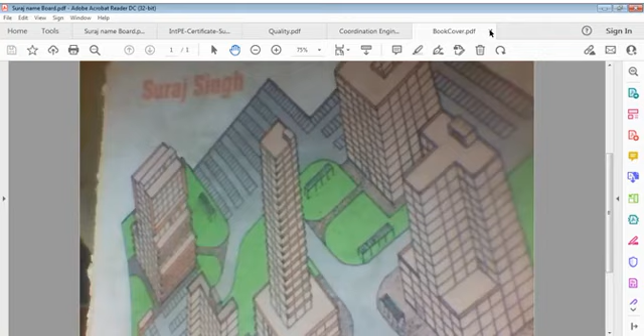Coordination, engineering, and public engineers - what do we have to say about this? We have to think of this in a different manner. Samanvaya Abhiyantriki, we call it in Hindi - coordination engineering. We call projects, plans, and engineering, and public, the general public. For reliability and quality engineering, cost, and delivery, they have to think of it. Coordination engineering is one must. It's something undefined, but it's essential. Without coordination, nothing works - that's what you have to think of. Coordination, what we can see in building.

What's coordination actually? In buildings, coordination is one way. In other plants, it's another way. There are systems, of course - systems are different, works are different. In life, coordination - so you can say everywhere in life, coordination is one way. In profession, it's another way. In society, there's a difference, and we can generalize if you think of it that way.

What is coordination engineering? We may say first we have to understand coordination, and then we can apply it in engineering. Although everyone talks, even a student in primary school coordinates, but we cannot recognize it. The student cannot understand it. Without coordination, nothing can be studied. You cannot study anything if you don't coordinate properly.

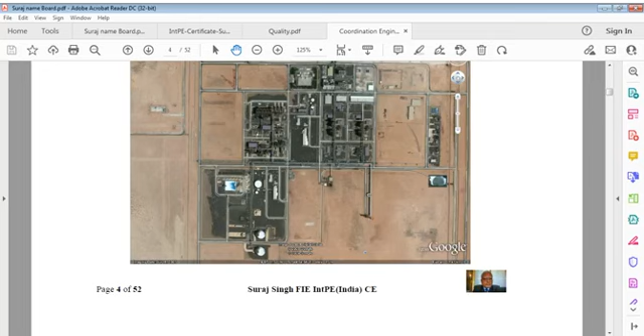Yeah, I'm just trying to reflect how everything... I don't know, it's here. Yes, it's in the row. If you can see many projects here.

Problem is, if I stick to that browsing and say here, plate 8, and that may be... not this one, school this is, sorry, hospital this is, yeah, this LNG. If you can see this LNG here, this was, I was involved actually on this. You can see these tanks here, 3 tanks and a 4th tank, and this was where I was involved as a project officer engineer.

This was for purposes of recording and checking, but I was also talking about control of another villa. I'm referring to this, this is also the same. Here also concrete of a GGBS type, you can say PFA type was used.

I don't have a photograph of the villa, but on that project I had to coordinate completely as the technical leader of that project. I had to coordinate accordingly, and I'm trying to tell you this for a reason. It's a very important item we can discuss.

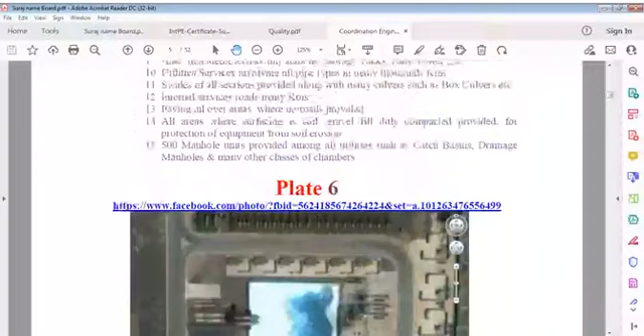As far as silica fume is concerned, on that project I coordinated completely.

I did not have knowledge of computers, of course, at that time. Computers were available, but I did not take any interest in that. Many people forced me, many leaders forced me, many engineering leaders forced me to use computers. But I was scared my eyes would be badly affected, and actually it was a fact. Now my eyes are affected. No problem, life is moving on.

When we consider silica fume, I'm just trying to tell what it is and how does it work.

Silica fume means very small particles, these are smoke particles, or fume particles, smaller than size of cement particle, much smaller than even smoke. When you have smoke, these are particles in suspension in air, very light particles, and these can fly in air, remain in suspension for hours together. Silica fume is that smaller size, or same size as particles of smoke. Cement particles are even heavier than that smoke.

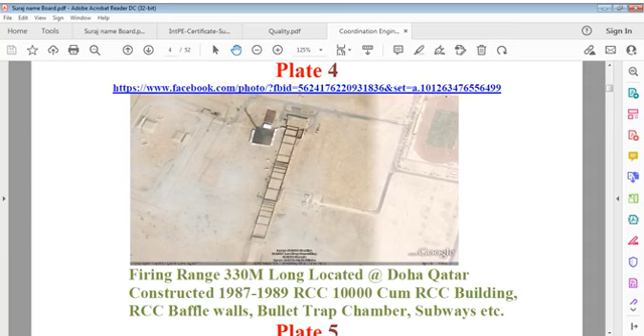So we have to consider this way now. If we go to another one here, if this is of course 87, this was.

This is an ordinary project, you may say, very ordinary project, but here there's electrical and mechanical importance, and here is civil importance. How to do work in civil engineering - I will tell a story of this project. It's actually very small, but professional work was carried out. You can see plywood was used for formwork, but the story behind this is very important.

I was very serious about foundations in this project, and in that area where this project is located, soil is not to that mark. This means soil is clay, probably having Montmorillonite content - that is a soil mineral, clay mineral we call it. Montmorillonite clay minerals, and that's very harmful.

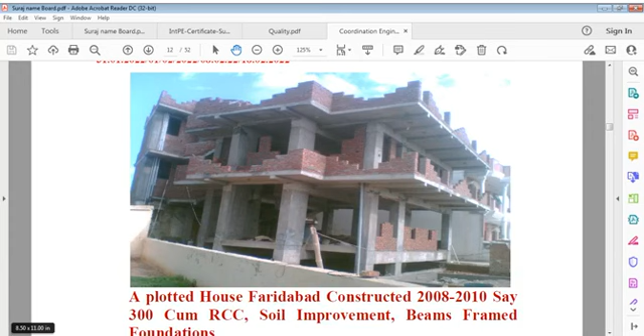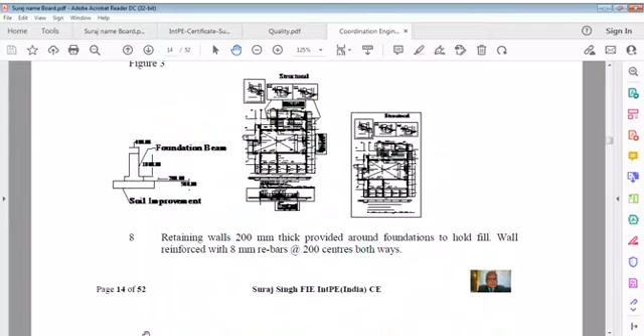This is another point that we use: if you see this portion, it's a continuous beam foundation, or you may say framed foundation, or kind of horizontal boxes connection.

You can see this complete. If you see the plan, all beams are connected. These beams are all continuous beams through columns, yes, through columns, continuity of columns. Beams through columns act as a kind of horizontal frame, not vertical frame.

Horizontal beam frame, and this reduces bending moment in foundations. Cantilever bending moment doesn't mean anything here. It's only fixed beam continuation, and you can say framed. It acts like a portal frame for vertical forces as well as horizontal seismic actions.

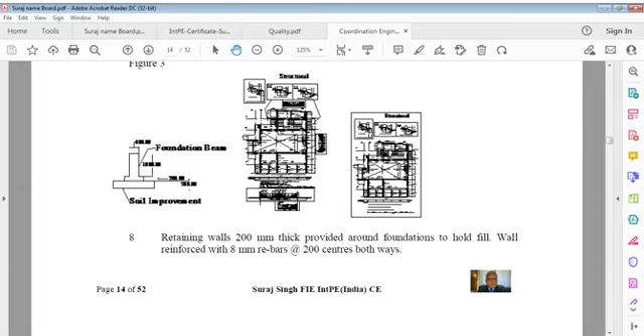When columns are there, during earthquake action, these beams work as columns, and these columns work as beams in that case. So you may say that's the impact of seismic force on this frame. You can see this whole structure is framed continuously.

This is the horizontal force coming onto this. This frame is very resistant, heavily resistant to that force. If you consider horizontal force coming onto this section, what will happen is a very strong column, its size is 40 centimeter by 120 centimeter. It's a very strong column, and this will give better resistance to that force.

Horizontal shear, and if it's in both directions, what will happen? Even if the building dances, it will stop dancing after some time, and that's the main functionality here. The dance will stop.

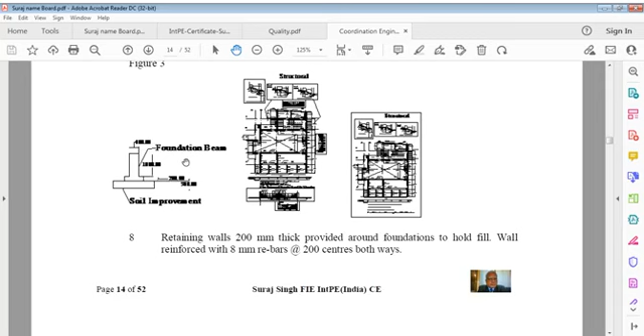Now, why do I say in buildings coordination is like that - architectural and structural we have to understand, structural and services we have to understand, mechanical or air conditioning services to electrical services, all these services to plumbing connections or plumbing locations, structural and all these services, architectural and all these services. And we have to understand decorative coordination.

We also have to understand building management coordination, which is also a very important subject. Just like these days we say 3D or 3D coordination through BIM, but that's not very important here, I'm not interested in talking about that. Now what I'm saying is, in buildings in those days, the talk was...

Architectural structural coordination, structural architectural coordination, structural services coordination, or you can say first fix coordinations - HVAC, electrical, electromechanical we call it, architectural, structural, and lift coordination, lift well coordination, or you may say many other types of coordination. Building management is a very important one.

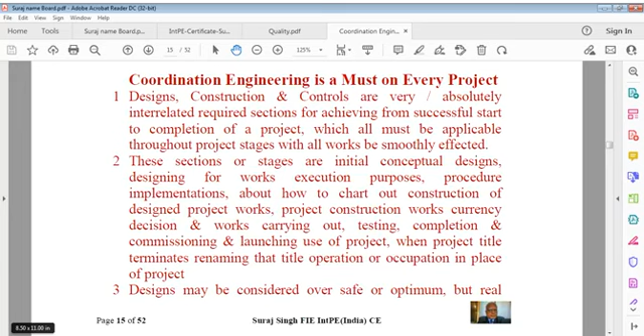That's why I try to see this. If you want to show, I can show you also this, no problem. We'll just recommend, and you'll see this. Why I'm saying it's important to keep watch, and that's also important.

The loading is coming in, and you can see this temperature here now. I'm printing it out, and you can see it in PDF format. It's coming, it's here now. You can see this format is coming, and of course we have to be realistic in this to keep watch.

It's coming, hold on. Come on, don't waste time. We have time for this. Not responding—what's not responding? It's come, it's responding now. So it's there, you can see here.

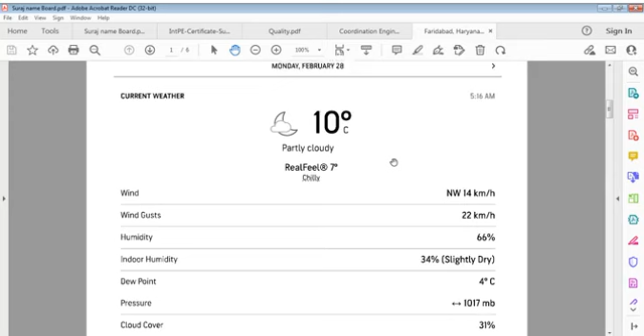It is 10 degrees. Current weather February 28th, 5:16 a.m. Partly cloudy, 10 degrees. Wind is 14 km per hour, wind gust is 22 km per hour. Humidity is 66%, indoor humidity is slightly dry at 34%. Dew point is 4 degrees. So 10 degrees and 4 degrees.

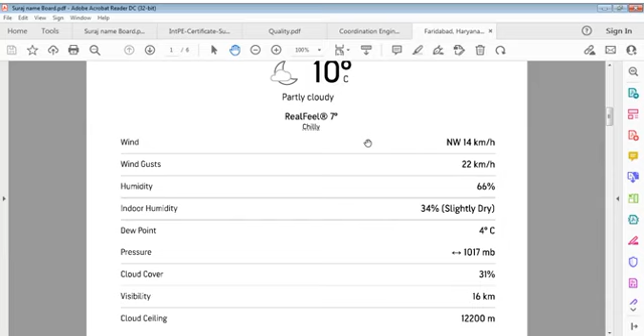Pressure is ordinary and 31% cloud. Visibility 16 kilometers. In daytime 27 degrees forecast, and maximum UV index 6, high. Expected is 30 kilometers wind gust. And next day is 12, so it will come down to something.

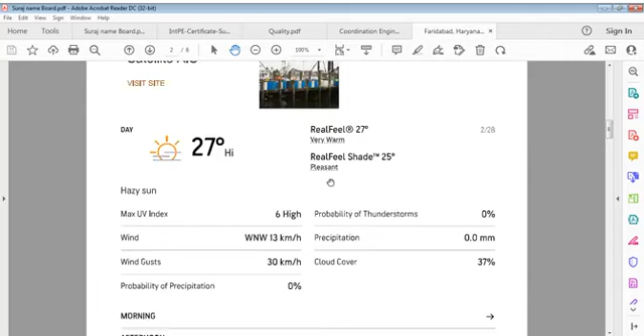So I wanted to show all this to you, and keep it off now. So we can move on to our subject. Just trying to show you how we have to link all this, and now you can say, okay, that's fine.

Come back to coordination engineering. Coordination, as I say, is a very important point in the engineering world, and we have to be a little serious about this. It's not only that—everybody of us should be serious, because it is coordination that helps us, and it helps in quality and coordination also.

Quality is important, and every day I talk of quality, and quality remains with me in my mind. I see these days people are not serious about quality. I think quality culture has changed—that if no quality means no problem, people think so. Is it? No, I don't think so.

But generally, people don't want to learn any quality. They don't want to learn how to get serious about work. They just want to remain in their mind without any narcotism—they want to enjoy life. You keep enjoying life, meaning not facing struggles in life, and quality is a struggle. In fact, quality is very poor—we can say no value of quality if no value of coordination.

That's why we have to keep sleeping, or we have to get awakened—that we have to decide. No one can help it, and coordination engineering is so much different. We can say it's for everything. Coordination engineering is a must on every project.

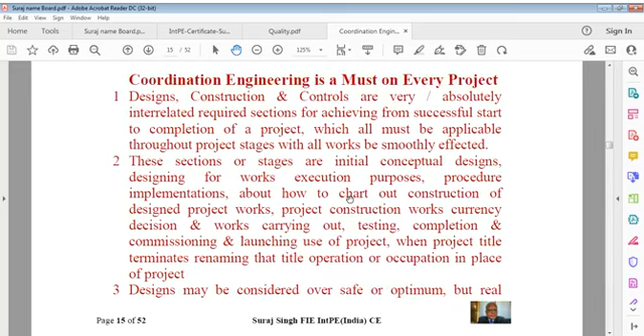Let us say if we can do something on this—coordination engineering is a must. Is it must-able or not? That's the point you have to consider. Are we so serious about this or not? That's the point you have to consider. How can we help? It's the point we consider.

So it's a very serious issue, coordination engineering, and we have to coordinate. We have so many ways to coordinate, but first we have to understand what we are going to do, and that's an important point. What we have to do, we can't say otherwise—what we have to do, we should do.

That's right. For example, there are so many activities in buildings. How many of you understand? I'll let you know what we talk about this, and the points should be very clear. We can find out anything in that, but I speak something from my own writing.

As I showed you this book, which I showed the cover of here, we can talk something out of that. We can take something out of that in this book. I would say it's not actually, it's just a note—so many notes are here, and we can take those into consideration, and some activity list is there.

It's very dark actually, I can't speak—it's very, very dark. I'll take it some other time.

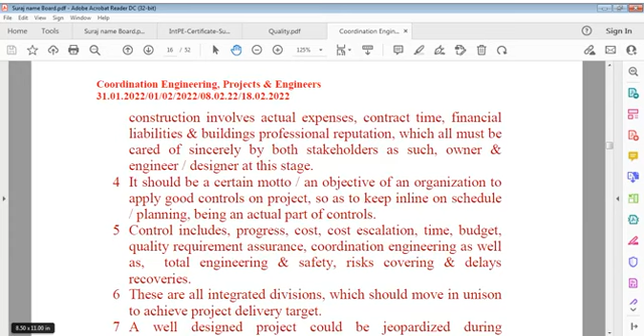Based on my understanding, what activities do we have to think of, what activities do we have to consider in buildings or foundations? First of all, we have a list of activities which everybody knows. I'll give this in writing too, but here I'm just giving a brief talk on the concept. Whatever comes to my mind, I'll bring in my experience from papers or learned papers.

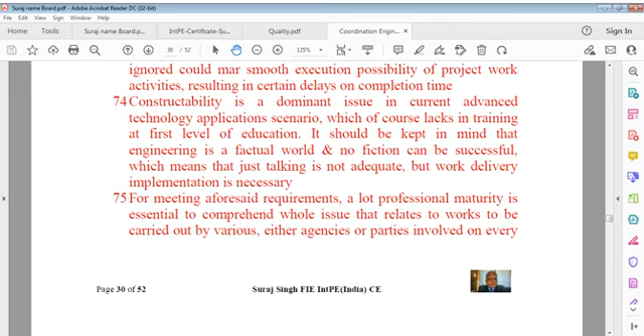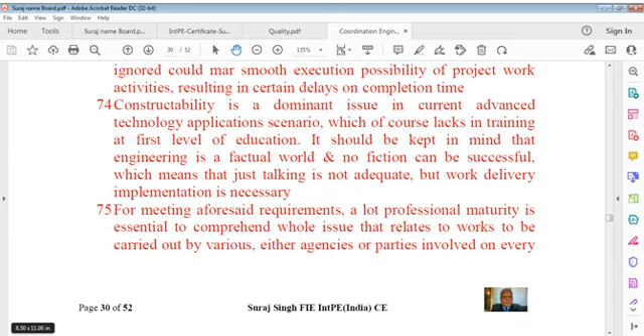For example, constructability is a point which is standard. I can say constructability is a dominant issue in current advanced technology application scenarios, which of course lacks training at the first level of education. It should be kept in mind that engineering is a factual world, and no fiction can be successful, which means just talking is not adequate. Work delivery and implementation is necessary. We have to understand this point. Constructability means there is no way out.

If you don't do it, as said before, the total concept of constructability, or buildability, must be taken care of during all such designs, and respective coordination, which if ignored could mar smooth execution of project work activities, resulting in delays in completion time. Design within this stage must be coordinated correctly, to an extent possible, among various disciplines, say between architecture and structural disciplines, structure and services disciplines, and all other disciplines involved.

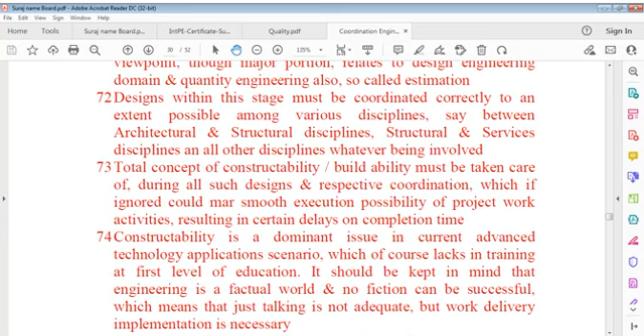Before that also, so many activities are given. Right now I'm talking of constructability, which is a very important one, and we can understand also in our part, though everybody knows this is there, but what does constructability mean actually?

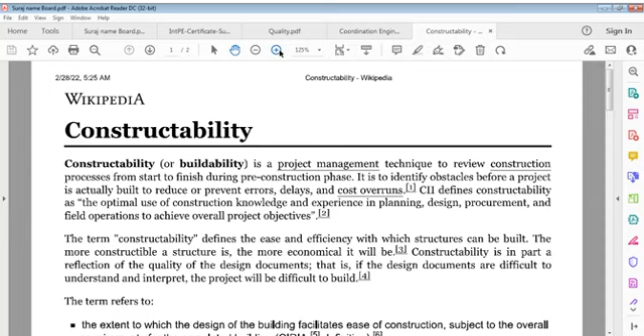Let us say constructability. Let me just check and tell you, it's not a long one. Let me show you, it's an ordinary one, not a big issue. Just for information, I'm trying to find it out for your purpose so you can understand better. Nothing secret here. What's constructability? Let's see what Wikipedia says.

Constructability or buildability is a project management technique to review construction processes from start to finish during the pre-construction phase. It is to identify obstacles before a project is actually built, to reduce or prevent errors, delays, and cost overruns.

Now it defines constructability as optimal use of construction knowledge. Optimal means the best one, whichever is best out of nice and expensive - it shouldn't be so cheap, but it should work also. That's called optimal, a kind of ideal condition we can say - optimal use of construction knowledge and experience in planning, design, procurement, and field operations to achieve overall project objectives.

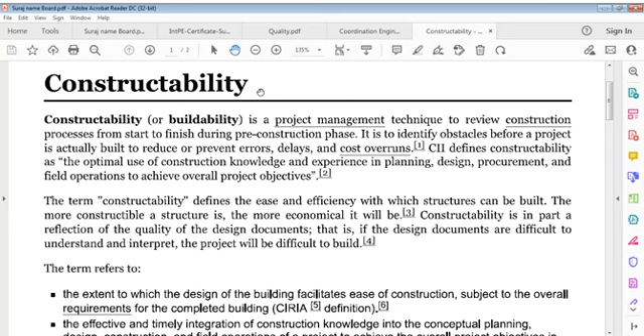You can read it again - it's to identify obstacles and control or combat them, before a project is actually started or built. We have to reduce errors, reduce delays, and reduce cost overruns. CII defines constructability as optimal use of construction knowledge and experience in planning, designing, procurement, and field operations - so you can say it's kind of a PC activity - to achieve overall project objectives.

Constructability is a term that defines the ease and efficiency with which structures can be built. The more constructible a structure is, the more economical it would be. Constructability is in part a reflection of the quality of design documents - that is, if design documents are difficult to understand and interpret, the project will be difficult to build.

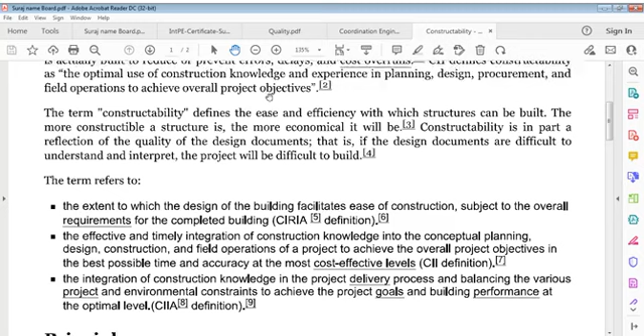So here is a question to designs - the extent to which the design of a building facilitates ease of construction, subject to overall requirements for the completed building, which is called CIRIA: effective and timely integration of construction knowledge into conceptual planning, design, construction, and field operations of a project, to achieve overall project objectives in the best possible time and accuracy at the most cost-effective levels.

Integration of construction knowledge in project delivery, balancing various project and environmental constraints to achieve project goals and building performance at optimal levels.

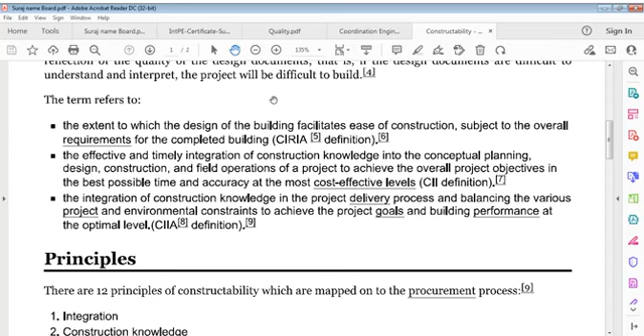What are the principles of that? Let's say there are 12 principles. There are 12 principles of constructability which are mapped onto the procurement process.

It says: integration, construction knowledge, team skills, corporate objectives, available resources, external factors, program, construction methodology, accessibility, specifications, construction innovation.

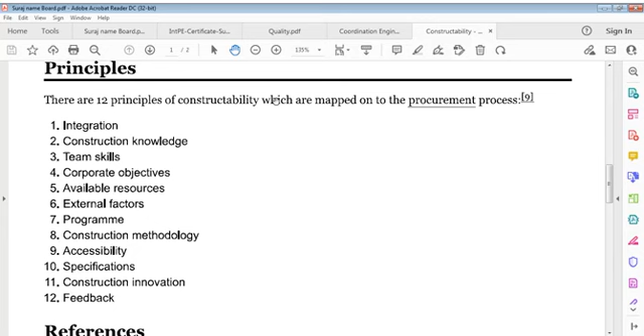Harm in saving that, what's wrong with that? Let's save this also, we can save in MS, no problem. We can say this is construction, of course, constructability, Wikipedia. So let's save it as it is. Alright.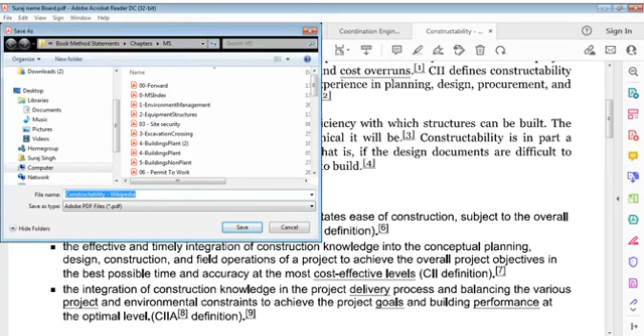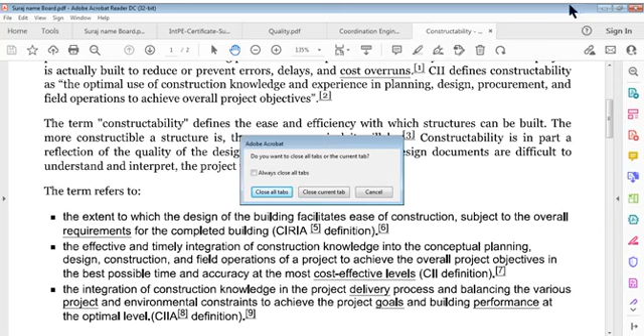So these points we consider, and since this is just two points we have to understand that. Now we'll go to the other one here. It says in this, of course it would say something. There's nothing else as such.

I say let's say something else, construct Wikipedia this also. Now what is the meaning of constructability? Let us see. Constructability, a term used in the construction industry and not fully understood, is the integration of construction expertise and knowledge into the design phase or pre-construction of a project.

What does constructability mean? Again this is the question. So first it says people ask what's the meaning of construction, because constructability is a term used in the construction industry and not fully understood well. Well, what does it mean? The question is, what does constructability mean?

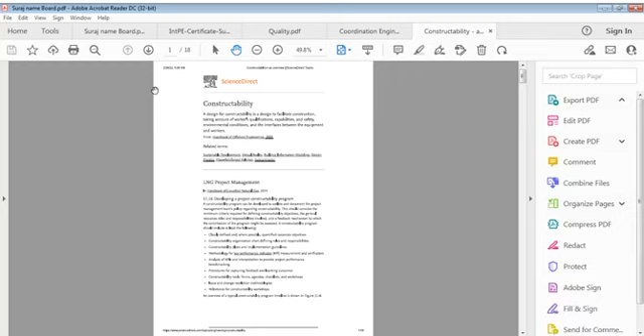I'm just trying to help you understand more, and I also understand more myself this way. I have long experience, but learning has no limits - we can learn a lot. At this stage I want to learn more. It's not that I'm gaining new knowledge, but it's a kind of information provision we have.

So let's just save it - save now, save as, so that you can name it. I'll put save as, and save it as constructability overview. All right, let's save it like this. Now I'll go and look at constructability.

What does this mean by constructability? Let's think about constructability. A design for constructability is a design to facilitate construction, taking into account workers' qualifications, capabilities, and safety, environmental conditions, and interfaces between equipment and workers.

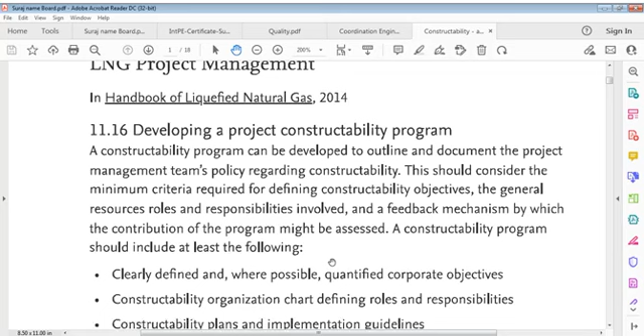We have a handbook of global related terms - an LNG Project Management, and that's what it says: LNG is developing a project constructability program. How do you make a constructability program? A constructability program can be developed to outline or document the project management or organization team's policy regarding constructability.

It should consider minimum criteria required for defining constructability objectives - general resources, roles, and responsibilities involved - and a feedback mechanism by which contribution of the program might be assessed.

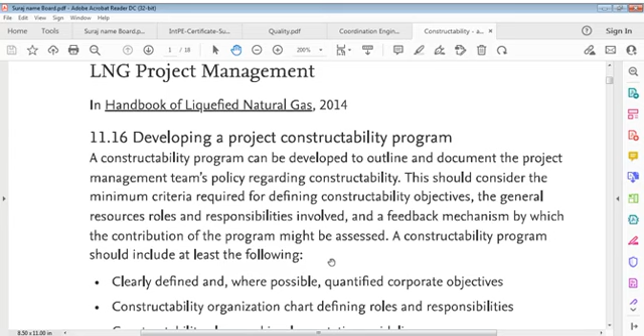A constructability program should include at least the following: clearly defined and, where possible, quantified corporate objectives; a constructability organization chart defining roles and responsibilities.

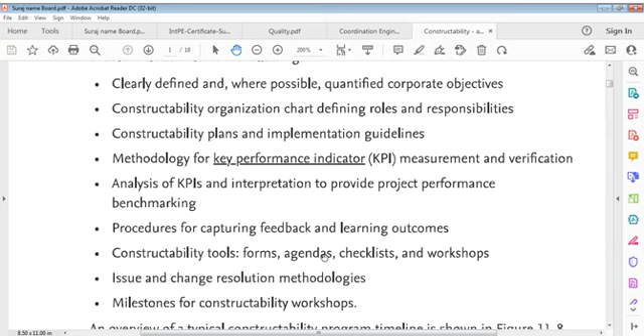Constructability plans and implementation guidelines; methodology for key performance indicators, KPI - measurement and verification. So methodology for KPIs means we have to analyze these key performance indicators and interpret them to provide project performance benchmarking, and a procedure for capturing feedback and learning outcomes.

And of course, constructability tools: forms, agendas, checklists, and workshops, issues and change resolutions - a methodology with milestones for constructability workshops. Here's an overview of a typical constructability program timeline.

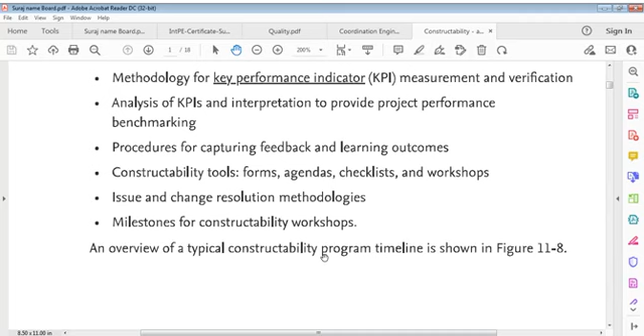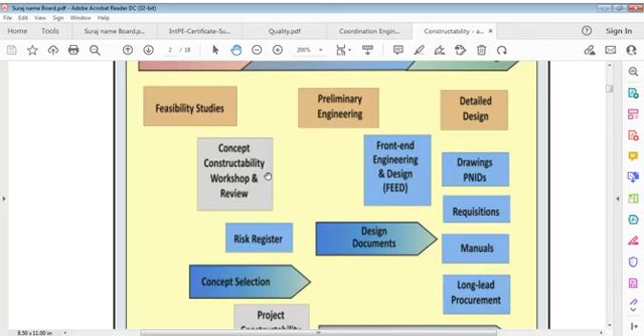After preliminary engineering design we have detailed designs, drawings, P&ID, requisitions, manuals, long lead items, and long procurement - this is part of the preliminary design within front-end engineering design and the design documents. Then we have concept studies, constructability workshops and reviews, risk register, document design, concept selection, project constructability plans, and constructability input and assistance to project planning.

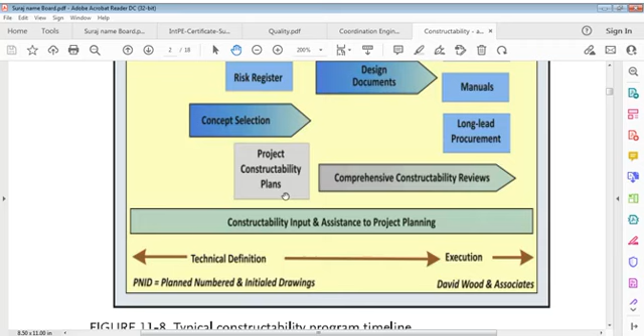Now, what this says is that a project construction kicks off - the most significant constructability point.

It says a constructability program - as we call it, developing a project constructability program. That's our title. Let's see what other titles there are. This is development - developing a project constructability program.

Let me move it, otherwise it's not moving. That's the problem here. Let's see, the problem should not appear here.

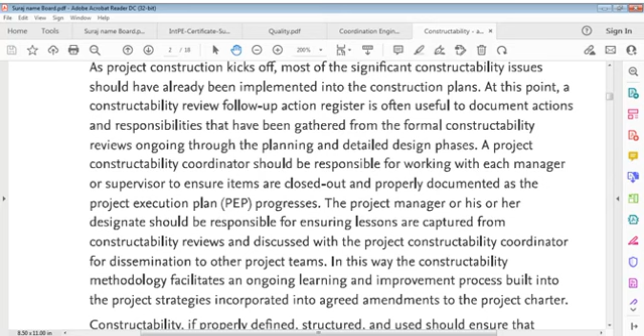Okay, and we'll go to what is constructability. Let me put this page off. So now let's see how we move forward, and now we can see what is constructability.

QC library, constructability, project management, constructability definition, law insider. I don't think there's much more available here. Let me see if I can find something more.

Constructability, CII, construction industry. Let us see what it says. CII, let me see what it says. Certainly something different, it says no, let's see. Constructability, what is CII? I don't think it's giving something better, just some, no, leave it. It's nothing very important. Then constructability meaning, origin, leave it.

What is constructability review? What is buildability in construction? Buildability in construction 2019, integrating constructability into conceptual structural designs. Let's say first of all, what's buildability in construction. Just give anything, we'll see what's buildability in construction. There's something on buildability. Oh my god, it needs a subscription, I can't access it, it's a waste of time.

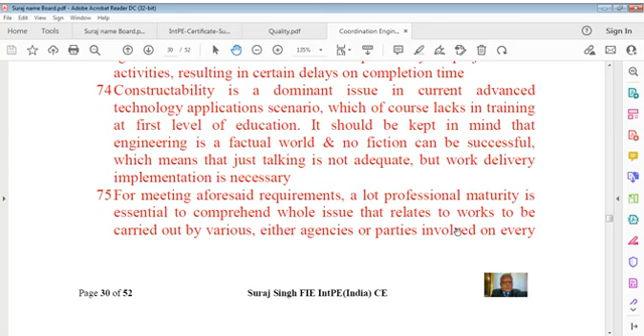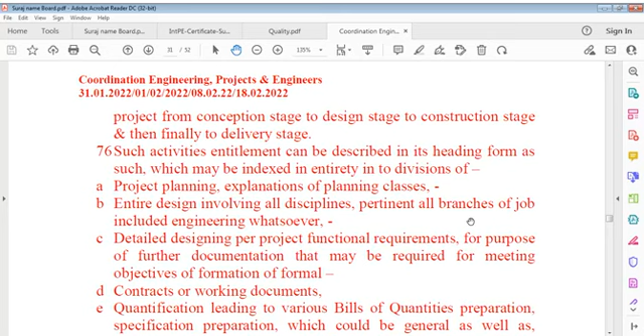Constructability is a dominant issue in current advanced technology application scenarios, which lacks training at the first level of education. I didn't find anything specific in the talks or references I searched on Google, except some theoretical answers. It should be kept in mind that engineering is a factual world, no fiction can be successful, meaning talking alone is not enough - it deserves practical work. For meeting aforesaid requirements a lot of professional maturity to comprehend the whole issue relating to works carried out by various agencies or parties involved in every project, from conception stage to design stage to construction stage and finally to delivery stage.

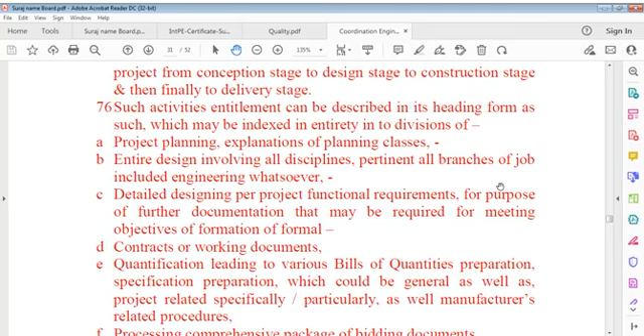Such activities can be described in heading form, indexed as introduction of project planning, explanation of planning classes, entire design involving all disciplines pertinent to all branches of jobs including engineering, detailed designs for project functional requirements, documentation required for meeting objectives, formation of formal contracts, working documents, and quantification leading to various bills of quantities and specification preparation. All these points are there.

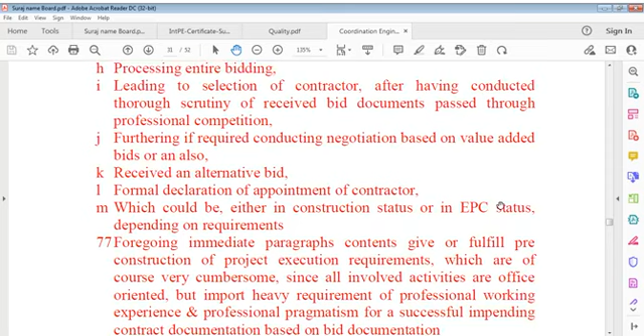You can say this is a very important phase. We can point to 76 here - let's see what it says once again.

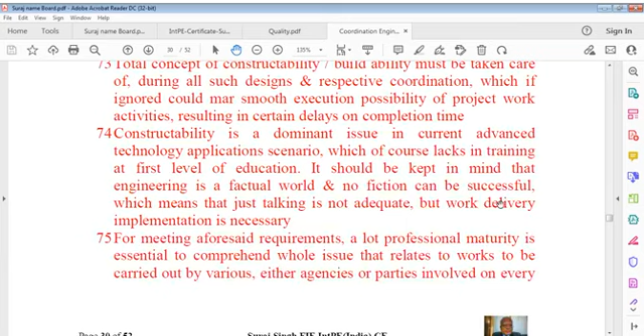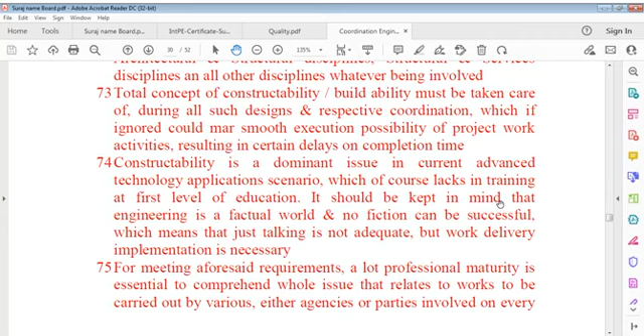It's because of 75, which says: for meeting aforesaid requirements of constructability - that's also the total concept of constructability. Buildability must be taken care of during design and coordination, which if ignored could mar smooth execution of project work, and therefore constructability is a very dominant issue in current advanced technology applications in this scenario.

Which of course lacks in training at the first level of education. It should be kept in mind that engineering is a factual world and fiction cannot be successful. So what are these points?

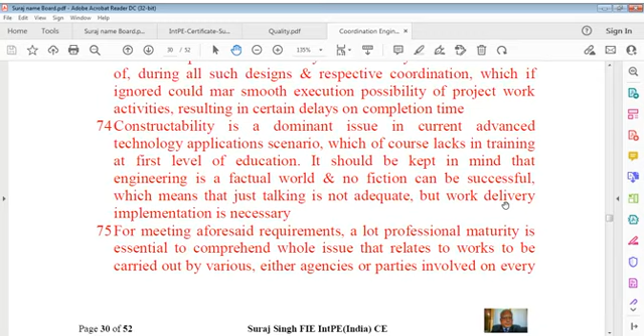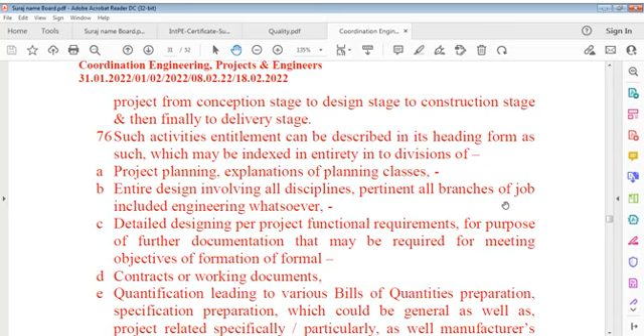We can point to 76 - such activities entitled, what activities actually do we have to refer to? This can be described as heading form - we are just giving heading explanations, explicitly giving analysis of project planning and explanations of planning classes.

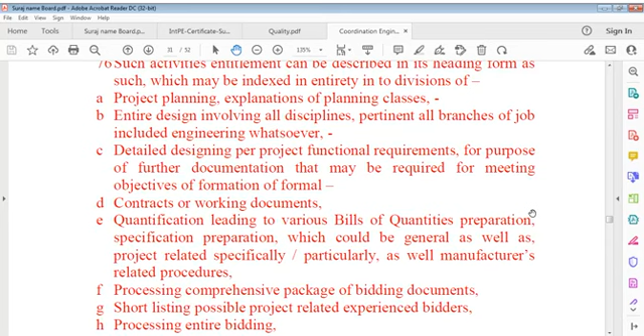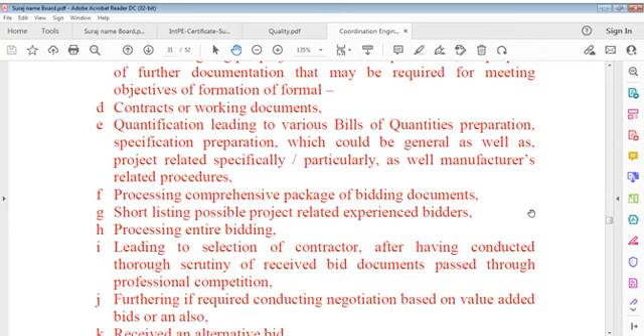Entire design involving all disciplines pertinent to all branches of the job, including engineering, detailed designing per project functional requirements for purpose of further documentation that may be required for meeting objectives, formation of formal contracts or working documents, quantification leading to various bills of quantities, specification preparation which could be general as well as project related, particularly manufacturer-related procedures, processing comprehensive packages of bidding documents, and shortlisting possible experienced bidders.

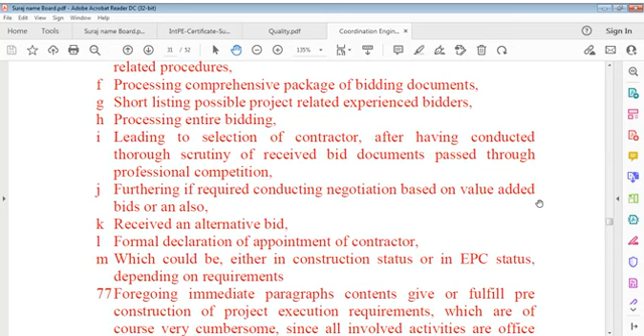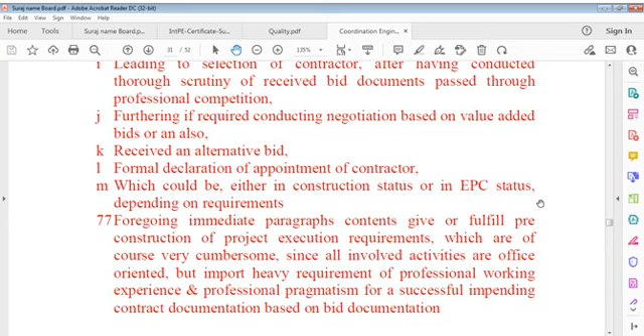And processing the entire bidding, leading to selection of contractors after conducting thorough scrutiny of received bid documents passed through professional competition, and if required, conducting negotiations based on value-added bids and any alternative bids received, leading to formal declaration of appointment of contractor, which could be either in construction status or EPC status depending on requirements.

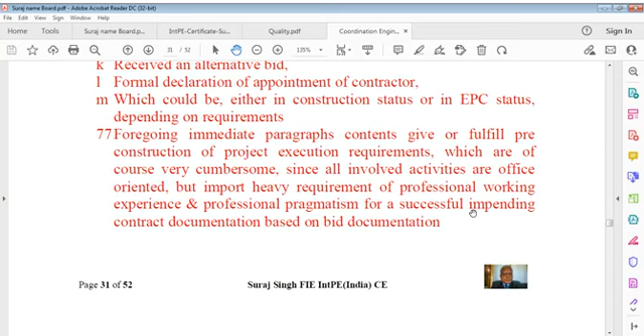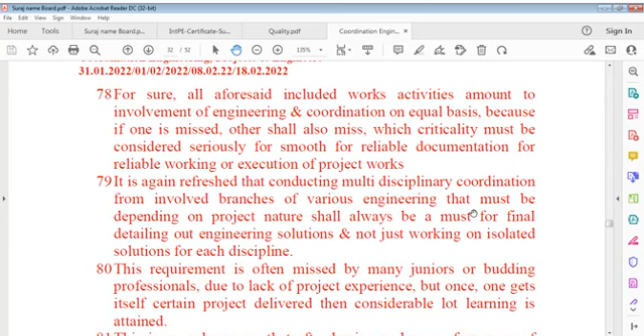77 - the foregoing major paragraphs give content to fulfill pre-construction or pre-project execution requirements, which are of course very cumbersome since all involved activities are office oriented, but import heavy requirements of professional working experience and pragmatism for a successful contracted document based on bid documentation. For sure, aforesaid included works activities that involve engineering and coordination on an equal basis, because if one is missed, others shall also miss, which in criticality must be considered seriously for reliable documentation and execution of project works.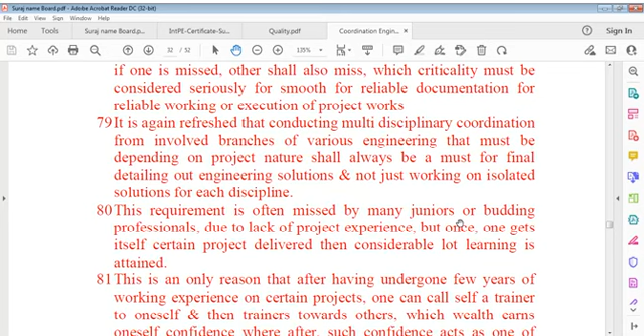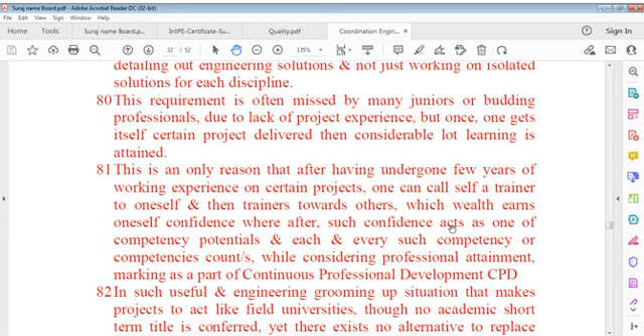It's again refreshed that conducting multidisciplinary coordination from involved branches of various engineering, depending on project nature, shall always be a must for final detailing of the engineering solutions, and not just working on an isolated solution for each discipline. This requirement is often missed by many juniors, the budding professionals, due to lack of project experience, but once one gets a certain project delivered, considerable learning is attained.

This is the only reason that after having undergone a few years of working experience on certain projects, one can call oneself a trainer to oneself and then a trainer towards others, which wealth earns one's self-confidence, whereafter such confidence acts as one of the competency potentials, and each such competency counts while considering professional attainments, marking a part of continuous professional development, CPD we can say.

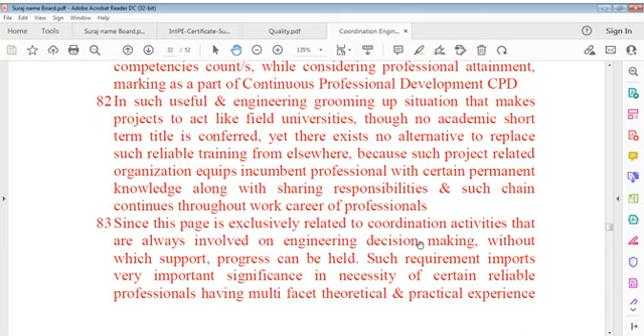And of course, in such useful engineering grooming situations that make projects act like field universities, though no academic short-term title is conferred yet, there is no alternative to replace such reliable training from elsewhere, because such project-related organization equips incumbent professionals with certain permanent knowledge along with sharing responsibilities, and such chain continues throughout the work career of professionals.

Since this page is exclusively related to coordination activities that are always involved in engineering decision making, without which support the progress can be held, such a requirement imports a very important significance and necessity of certain reliable professionals having multifaceted theoretical and practical experience.

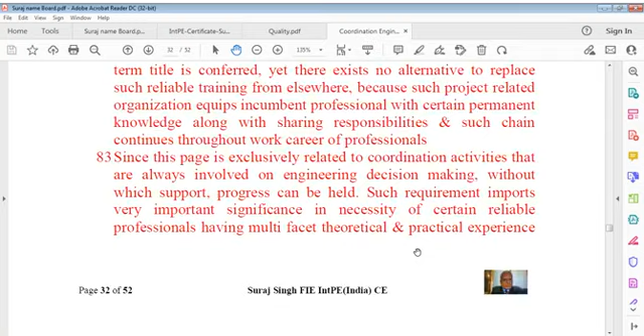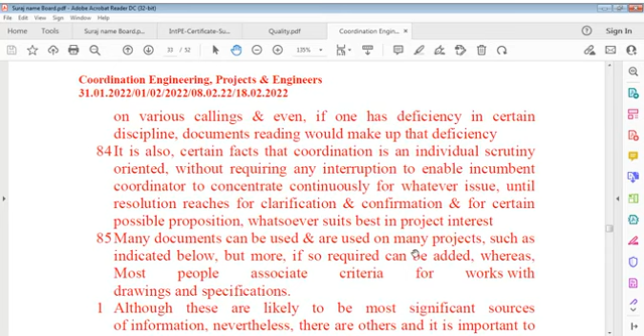On various callings, and even if one has deficiency in certain discipline, documents reading would make up that deficiency. It's also a certain fact that coordination is an individual scrutiny oriented activity without requiring any interruption, to enable the incumbent coordinator to concentrate continuously for whatever issue until resolution reaches for clarification, confirmation, and for certain possible proposition whatsoever suits best in project interest.

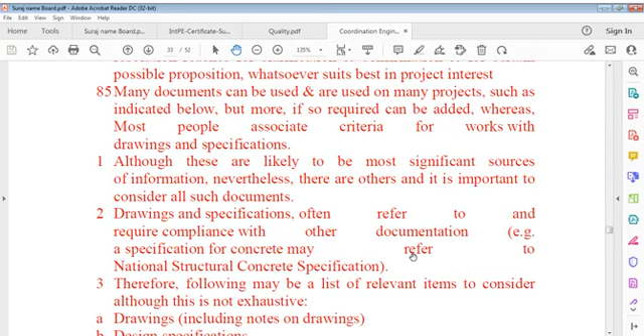Many documents can be used and are used in many projects, such as indicated below, but more can be added if so required, whereas most people associate criteria for works with drawings and specifications. Although these are likely to be the most significant sources of information, nevertheless there are others, and it's important to consider all such documents. Drawings and specifications often refer to and require compliance with other documentation.

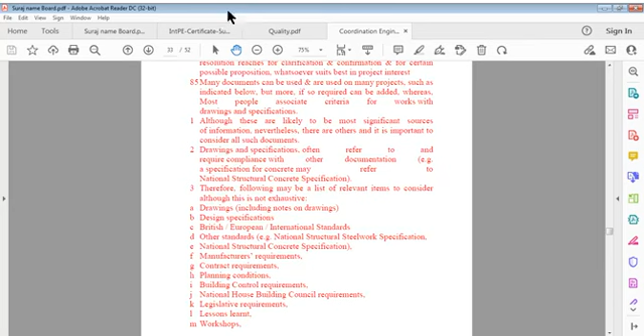Let's continue with that, sorry for the little delay. We have to take care of this now and conclude this. In fact, this talk, which is very important for everybody, we have to take into consideration and put in all this coordination issue, which is very important for everybody. And we have to move to a level we never moved to.

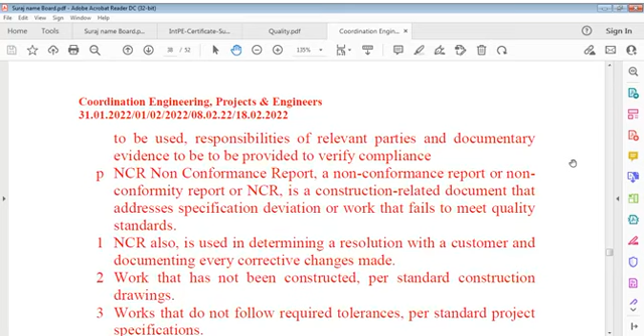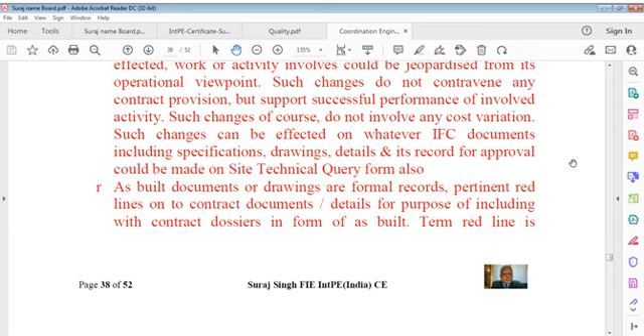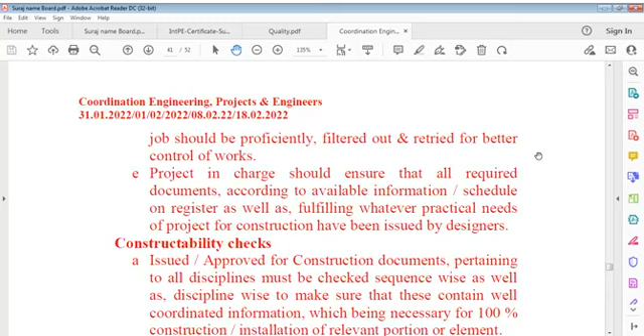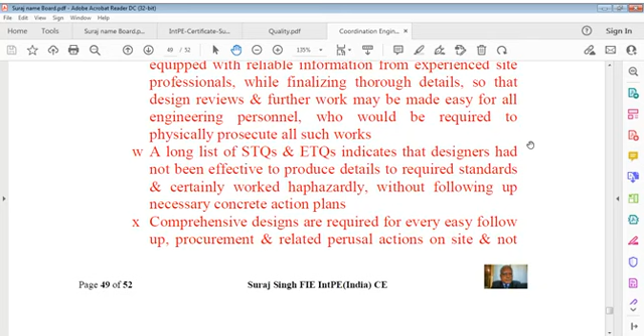As I said, we included also building management systems. Building management system, which is very important for current buildings. Building management system means building management of services and precautionary measures and protective measures that are permitted, that are required in that. And also, whatever is there, I've not gone to that one yet, but I have learned that this is when there is a fire breakout in buildings, how we have to take care of that, or when there is some other emergency, how to take care of that, how to organize, how to manage, how to worry about that. All that is required in the system, management system.

And when you say management system, this means we have to understand what we are talking of. It's not simply management in addition to services. That's also a part of services, but that is a different type of services. Loss prevention services means we have to take care of automation of all services, automatic connections of electrical, mechanical, plumbing, of course lift services, fire services. Everything should move in unison. I will take care of that in coming time, and of course I'm working with that.

It's very important, not so easy to understand just in one moment. We have to be very clear about that, and clear about everything as we discuss, and we have to discuss many times, and it cannot be concluded in just one go. We have to be very specific about that, particularly in gas services, we have to take care of that. We have to take care of how gas services work, how we have to handle it.

And how, for example, we can say building management. Let us see building management, what is that? There's a definition of that. Building control, building management system. A building management system, otherwise known as a building automation system, is a computer-based control system installed in buildings that controls and monitors building mechanical and electrical equipment such as ventilation, lighting, power system, fire system, and security systems.